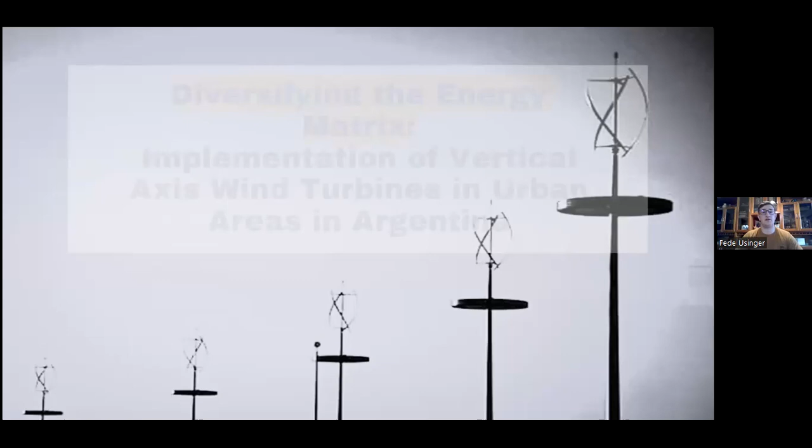Good morning. Today we come to talk to you about diversifying the energy matrix with the implementation of vertical axis wind turbines in urban areas of Argentina. We are Enzo Acosta and Federico Usinger, students from the Paraná Regional Faculty. Next, Enzo will begin the presentation.

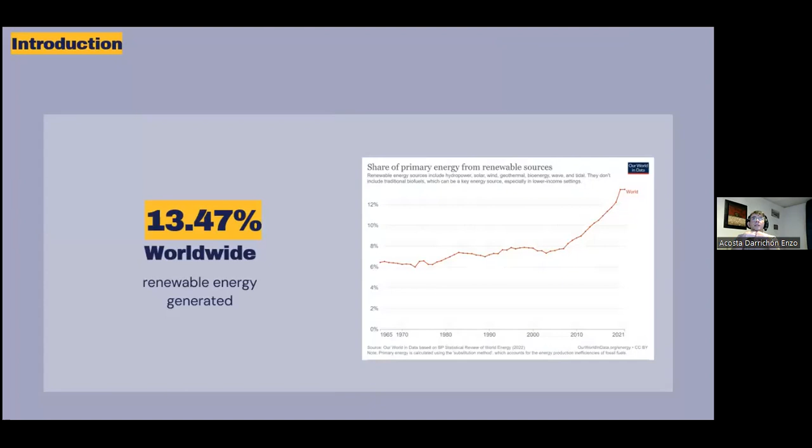Today, the world is in the transition to renewable energies, seeking every day to accelerate its implementation. Worldwide, renewable energy represents 13.47% of total energy in the global energy matrix. In this particular case, Argentina has implemented various types of renewable energy, but not to the same extent as fossil fuels or nuclear energy, since only 11.33% of the energy generated in Argentina comes from renewable sources.

Specifically, if we talk about wind energy, only 8% of the energy in Argentina came from wind farms in 2021. Due to the latter, it is expected that by 2035, this 8% will become 23% in the national energy matrix. In relation to the aforementioned national context and the overuse of fossil fuels, a new trend towards the implementation of low-power wind turbines appears worldwide, capable of operating with minimum winds of 2 meters per second. These turbines are called vertical axis wind turbines.

This work is related to the United Nations Sustainable Development Goals. Number 7 is called Affordable and Clean Energy. SDG number 7 has 3 targets to be achieved by 2030. The first target established that countries must warrant more modern, low cost and good quality energy. The second target established the need to increase the use of renewable energy globally in comparison with fossil fuels. The last target focused on doubling the overall rate of improvement in energy efficiency.

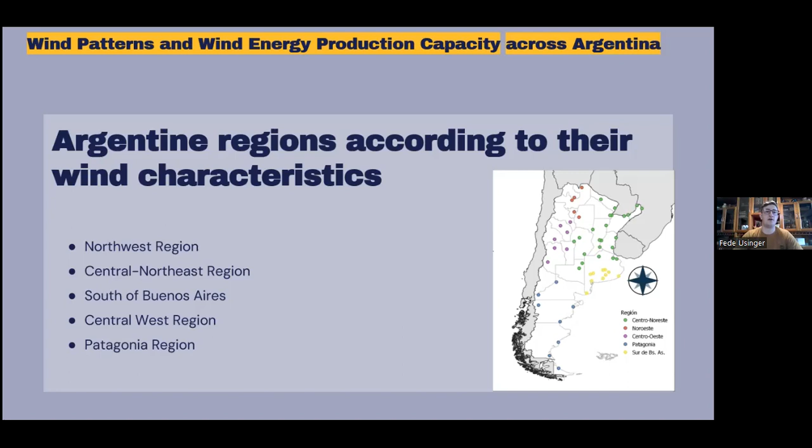The first region mentioned is the Northwestern. It is made up of the provinces of Salta, Jujuy, Santiago del Estero, and Tucumán, where the average wind intensity is less than 10 kilometers per hour. The second region is the Central Northeastern, which includes Córdoba, north of Buenos Aires, La Pampa, Santa Fe, Entre Ríos, Corrientes, Misiones, Chaco, and Formosa. The average wind intensity in the second region is between 10 and 14 kilometers per hour.

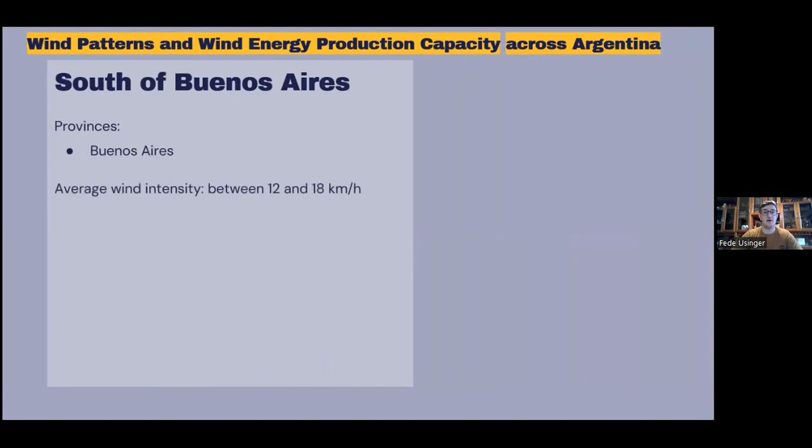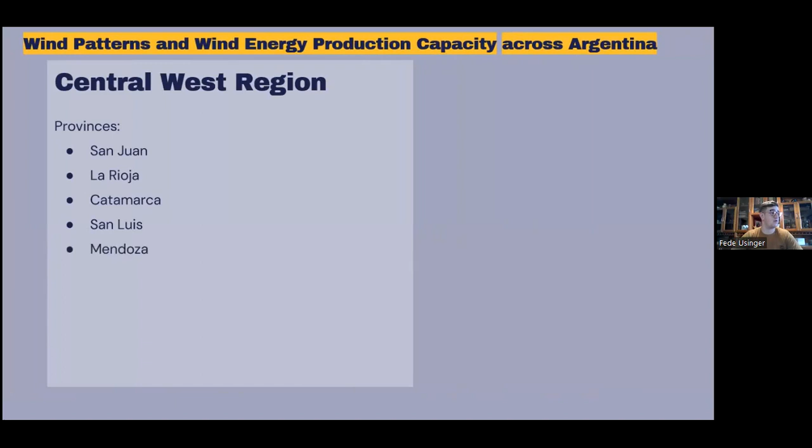The third region is the south of Buenos Aires, whose annual average wind intensity ranges between 12 and 18 kilometers per hour. The fourth region is the Central Western, which covers San Juan, La Rioja, Catamarca, San Luis, and Mendoza, where the average wind intensity is around 14 kilometers per hour.

As for the last region, Patagonia covers the entire southern part of the country from Rio Negro to Tierra del Fuego, and it has an average wind speed of 23 kilometers per hour. Considering the data just mentioned, it is evident that wind speeds remain above 10 kilometers per hour or 2.7 meters per second most of the year in the different regions of Argentina.

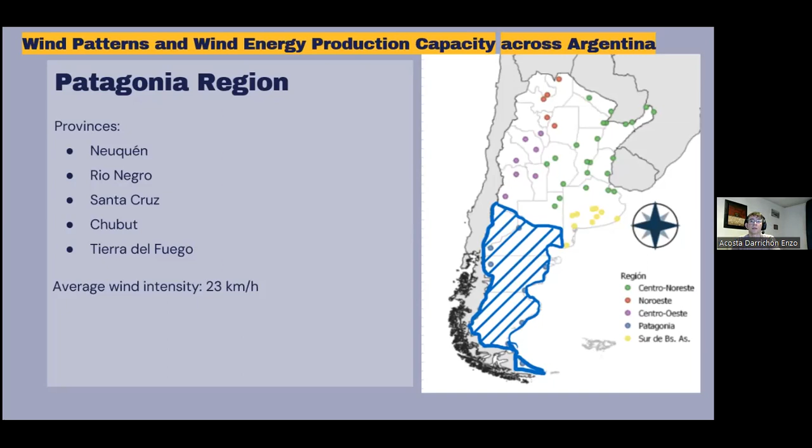This information verifies the feasibility of implementing vertical axis wind turbines, which will be explored throughout the work. The next section is vertical axis wind turbines. The wind turbines are a modern version of a windmill. The turbines use the power of the wind to generate electricity.

The wind turbines are made up of blades which attach through an axis to a reduction box. When the wind hits the blades, it causes the rotation of the axis, which through the reduction box converts the wind into electrical energy.

To carry out the transformation of mechanical energy into electrical energy through the rotation of the axis, there are two types of wind turbines based on the relative orientation. The first type is called horizontal axis wind turbines. In these turbines, the rotation axis is parallel to the ground, and they are characterized by the blades rotating in a direction perpendicular to the wind speed.

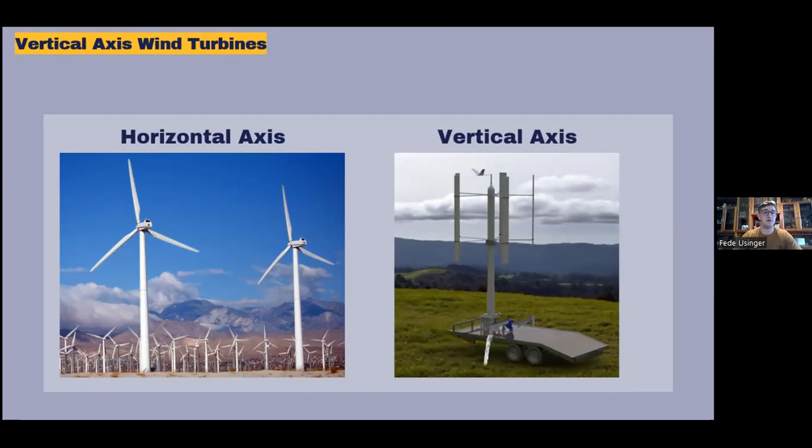The vertical axis wind turbines represent the second type. In this case, the axis of rotation is perpendicular to the ground. Vertical axis wind turbines have a distinctive feature: they do not need an orientation system. This means that they do not require complicated mechanisms to point in a specific direction or prevent blade stress when the rotor changes direction.

The vertical axis wind turbines can be installed close to the ground, making them easy to access for mechanics. Unlike horizontal axis wind turbines, whose compensation systems are located on the towers and support heavy loads, vertical axis wind turbines have the compensation system at ground level. However, wind speeds there are low compared to those that could be obtained if they were located at high altitude.

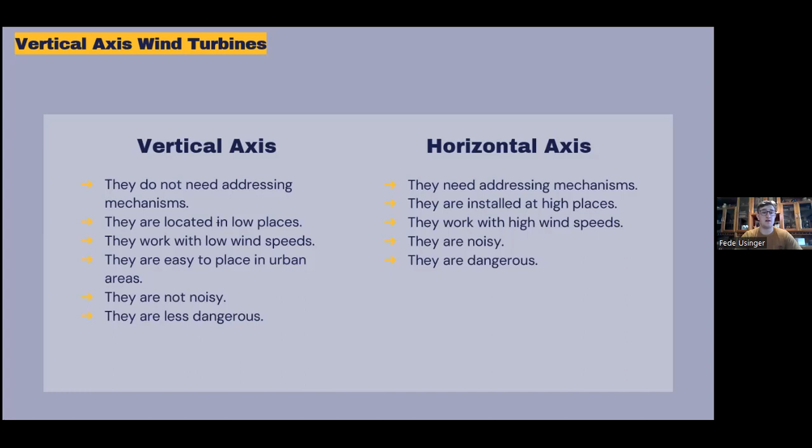Although the efficiency of the vertical axis wind turbine is lower compared to the horizontal axis wind turbine, they are easy to place in urban areas due to their lower noise level and their lower rotation speed. There are two basic designs of vertical rotor from which several variants arise. They are the Darrieus and the Savonius turbines. Next I'm going to explain them.

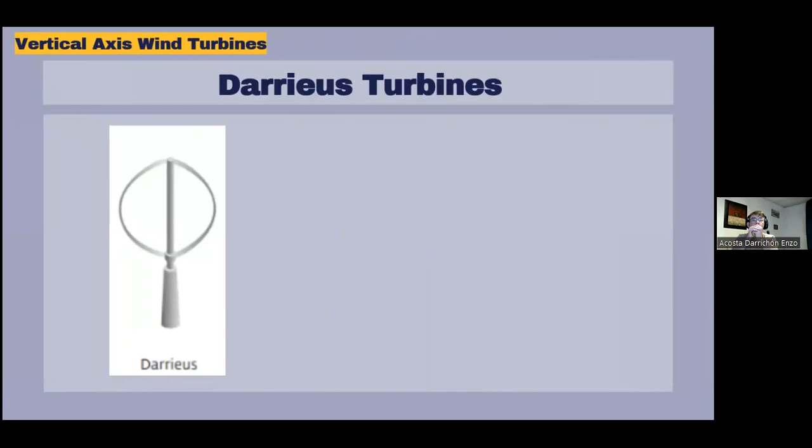Darrieus turbines. These turbines use the force of elevation of the air by lift, and they have great efficiency since the rotor rotates faster than the velocity of the wind. However, due to the particular shape of the blades, which are curved, they create a vibration in the shaft, and therefore greater wear on their bearings.

In general, these turbines need an external power source to be able to start rotating, since the particular shape prevents them from starting with low wind speeds. However, once set in motion, they can continue rotating until they obtain a speed faster than that of the wind. Due to the imbalance generated by the particular shape of these turbines, H-rotor turbines were created with the same operating principle. These turbines have straight blades, and they are not as efficient as the aforementioned.

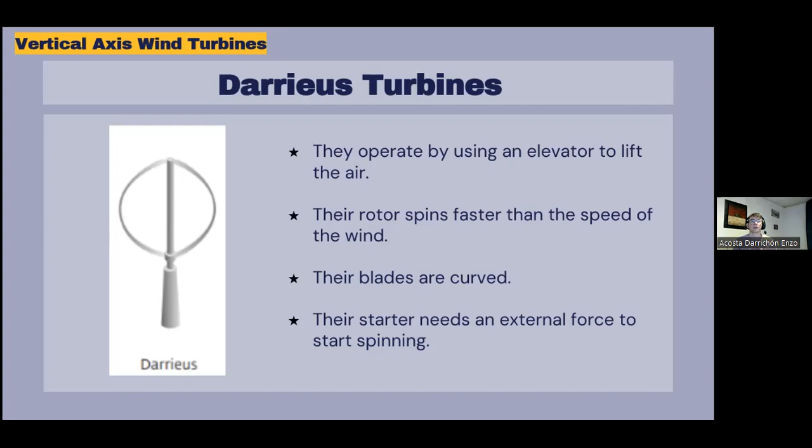The next type is the Savonius turbines. These are drag turbines which use aerodynamic resistance in order to take advantage of the wind's energy. When the wind hits the blades, it generates enough friction to be able to move them. As the wind pushes the blade, the rotation speed of the Savonius turbines is lower than the speed of the wind.

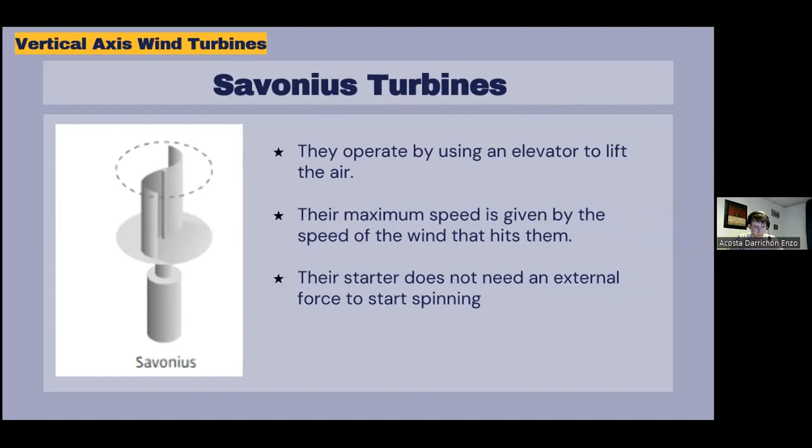Next, Federico will comment on the part called commercial products, which deals with some commercial examples of vertical axis wind turbines. Currently, the growing need to implement renewable energy has led the market to start producing vertical axis wind turbines more and more frequently. To explain the types of vertical axis wind turbines seen previously, and other more commercial ones, different products available in the market will be described below.

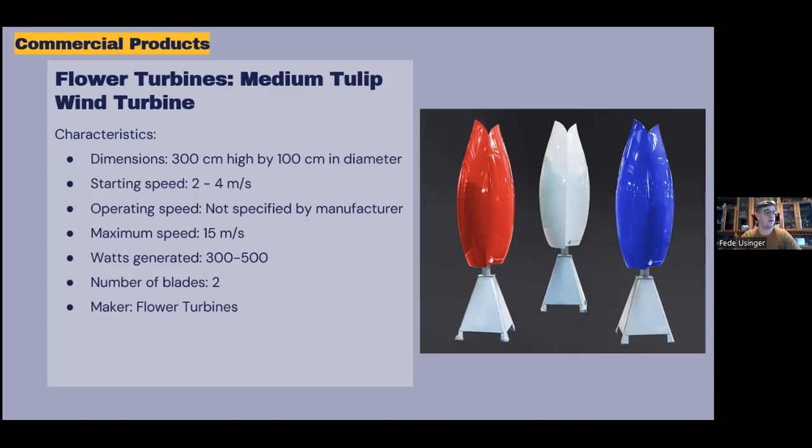Flower Turbines manufactures the model Tulip wind turbine. It has two blades, 3 meters high and 1 meter in diameter. The turbine starts operating at a wind speed of 2 to 4 meters per second, with a maximum wind speed of up to 15 meters per second. Although the operating speed is not specified, the turbine generates a power of 300 to 500 watts.

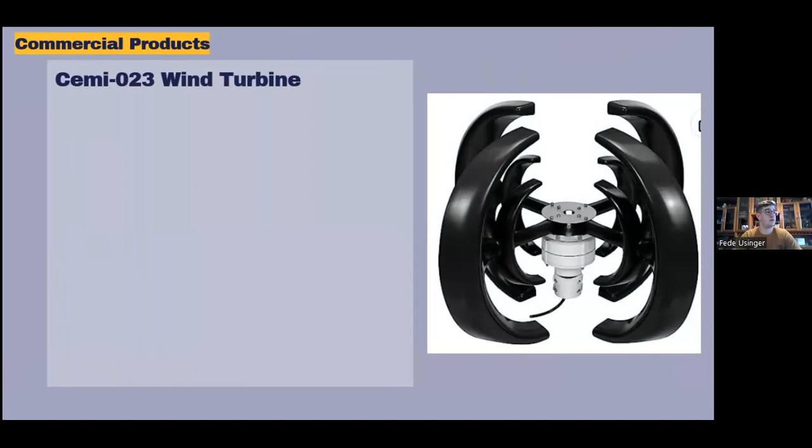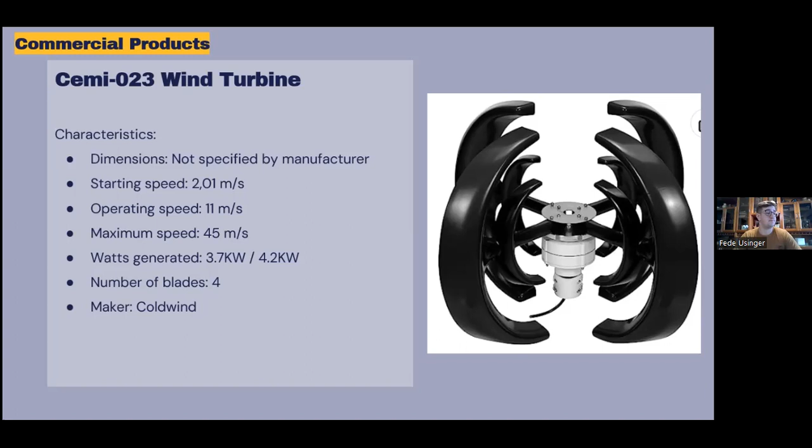The Cemi-023 wind turbine is produced by Coldwind. The dimensions are not specified by the manufacturer. It has a starting speed of 2 meters per second, an operating speed of 11 meters per second, and a maximum speed of 45 meters per second. This turbine features 4 blades and can generate a power output ranging from 3.7 kilowatts to 4.2 kilowatts.

Makemu Green Energy presents the Eolo generator, with dimensions of 195 by 130 by 130 centimeters. It has an initial speed of 1.9 meters per second, but there is no information about its operating speed or maximum speed. This turbine is available in power output options of 1, 2, and 3 kilowatts, and it can have between 3 and 12 blades.

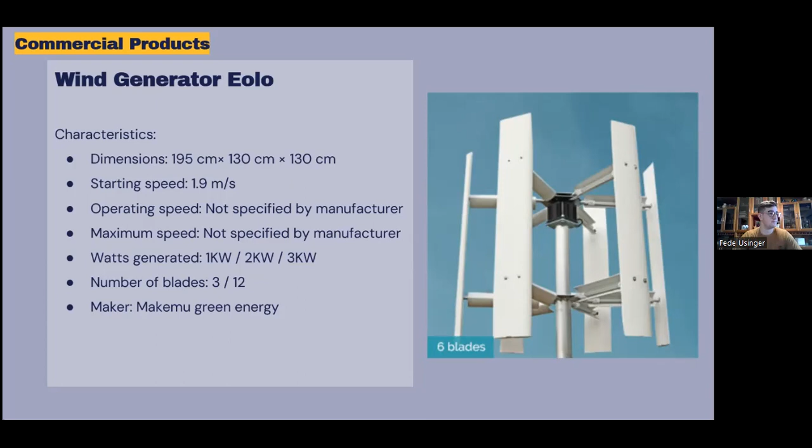The wind generator Domus, also manufactured by Makemu Green Energy, has dimensions of 115 by 130 by 65 centimeters. Similar to Eolo, it lacks specifications for operating and maximum speed. This model offers power outputs of 1 kilowatt, 750 watts, and 500 watts, and it is available with 3 or 6 blades.

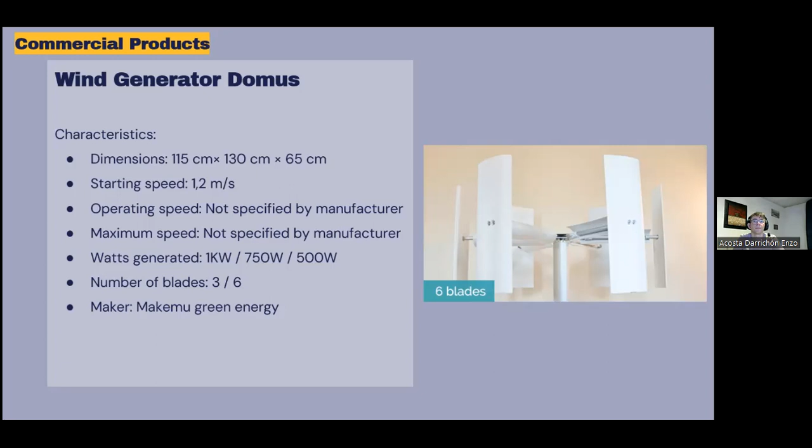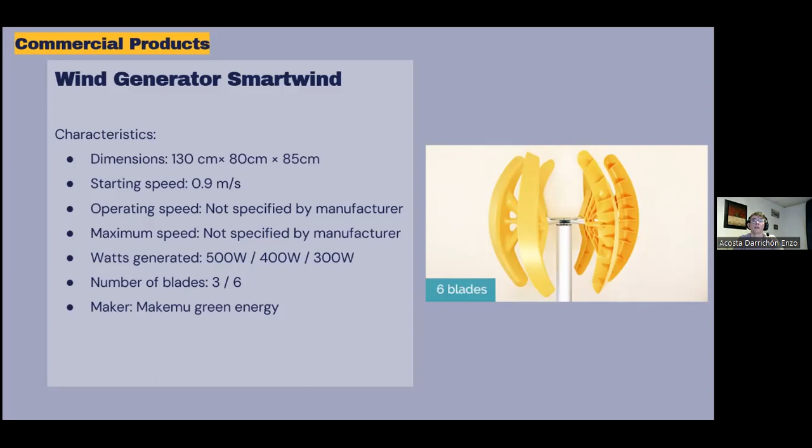Another offering of Makemu Green Energy is the wind generator Smartwind, with dimensions of 130 by 80 by 85 centimeters. It has a starting speed of 0.9 meters per second, and like the others, it lacks specifications for operating or maximum speed. It generates power ranging from 300 watts to 500 watts, and it is available with 3 or 6 blades.

Lastly, NL produces the wind generator Ninilady. It stands at 1.42 meters tall. It has a starting speed of 1.31 meters per second, and its operation speed is not specified. Its maximum speed is 12 meters per second, and it generates between 600 and 650 watts of power with 2 blades.

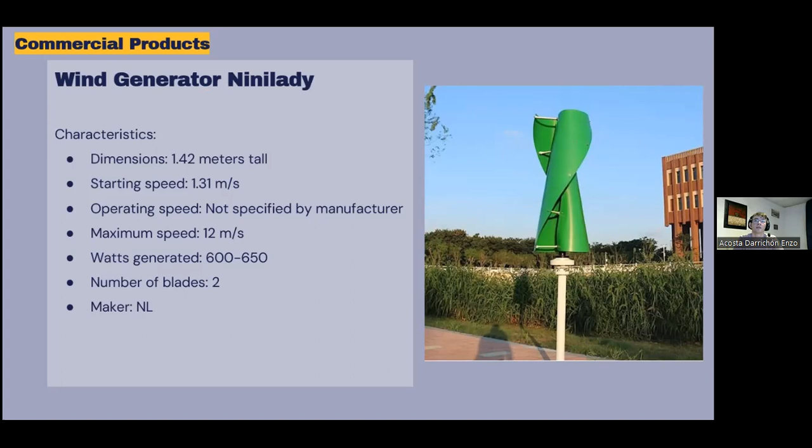Next, Federico will comment about the advantages and disadvantages of vertical axis wind turbines.

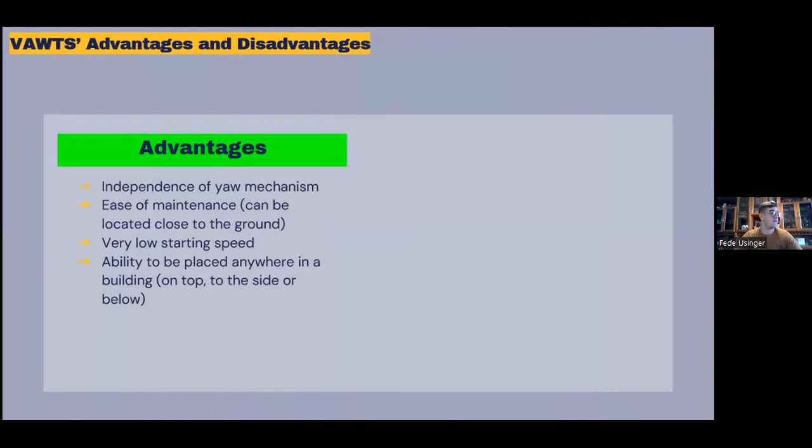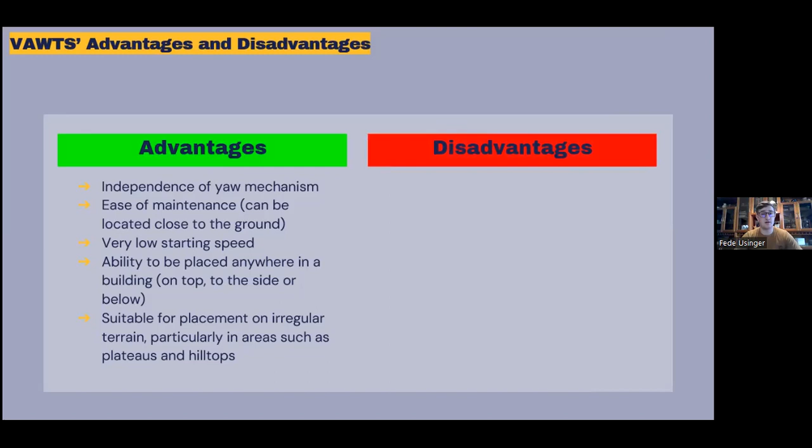Vertical axis wind turbines represent an interesting alternative to the more common horizontal axis wind turbines in energy generation. They have a series of advantages and disadvantages. Among their advantages: independence from yaw mechanisms, ease of maintenance, very low starting speed, and the ability to be placed anywhere in a building, suitable even for irregular terrain, particularly in areas such as plateaus and hilltops. As for their disadvantages: they have lower efficiency compared to horizontal axis wind turbines, and installing them close to the ground tends to reduce their operating wind speed.

It can be concluded that vertical axis wind turbines are less energy efficient than horizontal axis wind turbines. However, the ease of installation and the low wind requirements needed for the generation of wind energy make them a highly competitive product and of great importance for the development of wind energy, locally and globally.

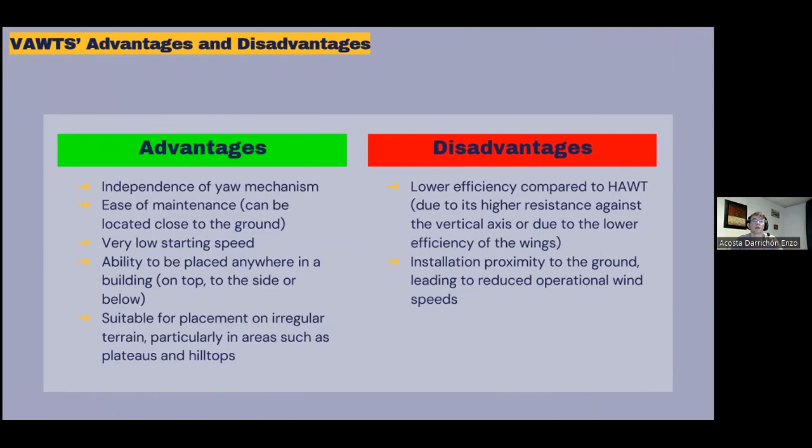In conclusion, vertical axis wind turbines are positioning themselves as one of the most promising alternatives from an energy and development point of view for implementation in urban areas of Argentina. Their minimal requirements make them a viable option for any region of the country, thus presenting a tangible response to the challenge posed by the United Nations Sustainable Development Goals.

The growing popularity of vertical axis wind turbines and their attractive design suggests that in the coming years we are likely to see them more frequently in the global market and integrated into future construction. These trends will not only contribute to greater clean energy generation, but will also require Argentina's commitment to the transition towards more sustainable energy sources and its independence from fossil fuels.